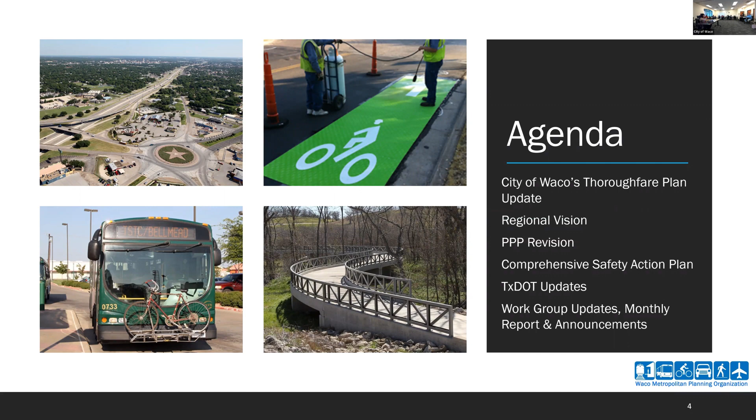The first item on the agenda is a presentation and discussion about Waco's 2023 thoroughfare plan update. We're in the middle of updating our thoroughfare plan. We're at the point where we'd like input from adjoining cities and like to share with you where we're at and what we're thinking. This is our draft of where we're at today, and I'm gonna let my friends from Kimley-Horn do the presentation so you can get some information about our thoroughfare plan.

Hey, how are y'all? Ryan Chamber, Kimley Horn, also with you, John Green. Got a little bit of a walkthrough on where we're at in the development of the draft plan.

Accomplished today, we'll talk a little bit about how we got there, but also some background on the history of the thoroughfare plan in the region. Introduce some of the cross sections that we introduced into the development of the plan. Also the process in which we've gone through to introduce some of the refinements in the thoroughfare plan, and then talk a little bit about what's next.

So first we want to discuss the evolution of the thoroughfare plan. Many of you know it, when the initial plan was developed back in 2000, really that looked at providing an adequate and efficient roadway network throughout the region. Providing connectivity between the jurisdictions was a critical component to that, but also making sure that from an emergency response standpoint, making sure for bus routes and connectivity through the schools, having a roadway system that really supports that.

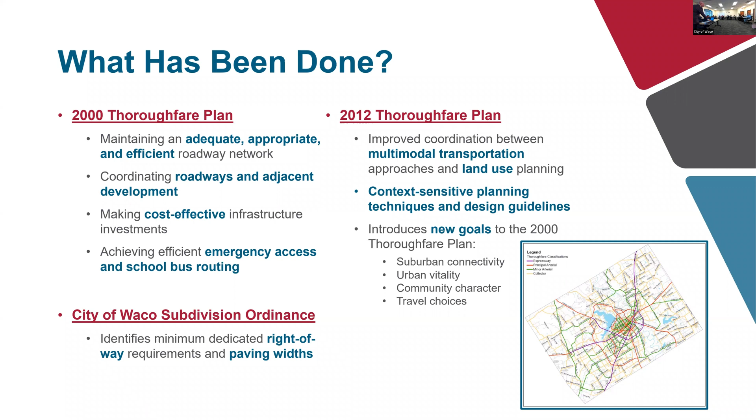So understanding that, where do we go from here? Even collectors are only shown under one class on the current thoroughfare plan. So let's talk about some of the cross sections.

We want to describe what currently exists in terms of the actual thoroughfare plan from 2012 versus the city's subdivision ordinance, because those two documents define the minimum right-of-way requirements for collectors and arterials, but they don't have any dimensions tied to cross section, nor do they include anything related to bike and pedestrian facilities. It's not really discussed, and you see that reflected in the different roadway sections.

So we organized the information for both the thoroughfare plan and the subdivision ordinance by street type, by right-of-way, and pavement width. You can see that while arterials and collectors are identified, there are differences in terms of right-of-way.

In the thoroughfare plan, there's a range of right-of-way from 100 to 120 feet, whereas per ordinance, for the principal arterials, it's 108 feet. That's historically what has been required, whether it's for development or roadways, at a specific pavement section.

Same thing, there are inconsistencies between the subdivision ordinance and the thoroughfare plan, even in the designation by name, whether it's major rural collectors versus commercial industrial. So there are opportunities here to eliminate some of these inconsistencies and clean this up.

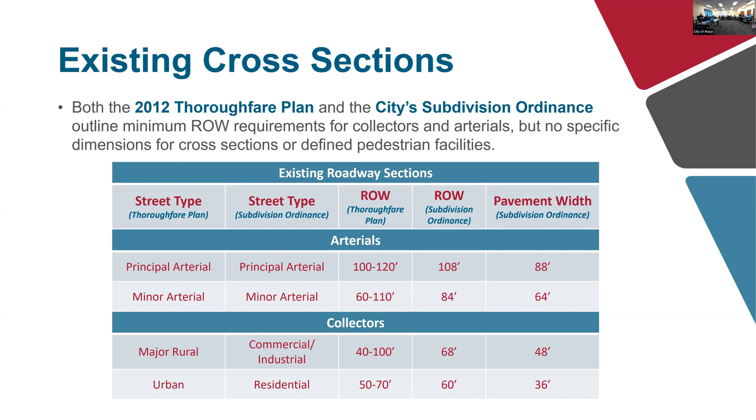So what we've done is look at identifying some proposed cross sections and what that would look like. Instead of just arterials, we're introducing going from principal arterials to minor arterials, with differences between the right-of-way, both preferred.

We understand that there are some locations or arterials throughout the region where we won't be able to get any additional right-of-way because it may currently be an existing 108 feet. That may be a constrained arterial section, and there probably always will be that. But for additional arterials, whether suburban or rural, we'd like to have 120 feet of right-of-way, though in some of your more minor arterials that might be down to 100 feet.

Pavement widths, again, now we're thinking about within that right-of-way, both the number of lanes, all 4-lane sections, but also introducing some of the parkway and both on-street and off-street pedestrian and bike facilities, and how that would impact both the arterials and the collectors.

So from a street context standpoint, we're looking at both suburban and rural. Then from the collectors, we would essentially have major collectors, those being suburban and rural, and then residential collectors. What we want to introduce today is also the actual cross sections.

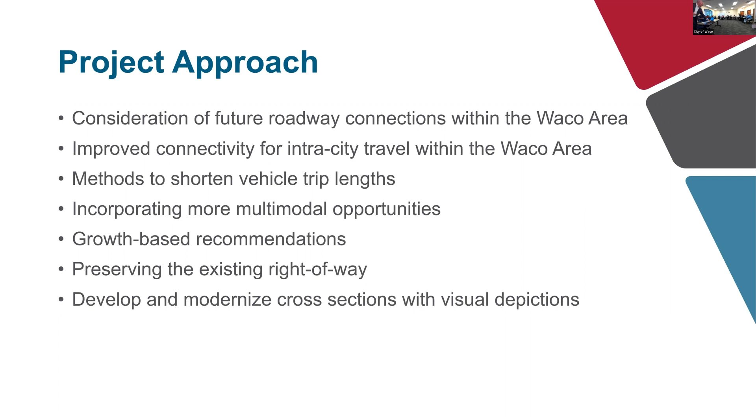So we started developing an overall inventory of the existing network.

Through use of existing aerials and imagery and actually driving the system, we understood what's currently out there as it relates to not only the existing thoroughfare plan, but also the national highway system. How does it relate to both of those documents? But also, does the road currently exist in its full configuration relative to the thoroughfare plan? Are there opportunities, are there needs for widening? So we looked at capacity, existing capacity. Is it rural? Is it urban? Is it curb and gutter? What facilities exist on those roadways? Are there existing sidewalks or needs for sidewalks or pedestrian facilities, or bike facilities on existing roadways? So we documented all of that.

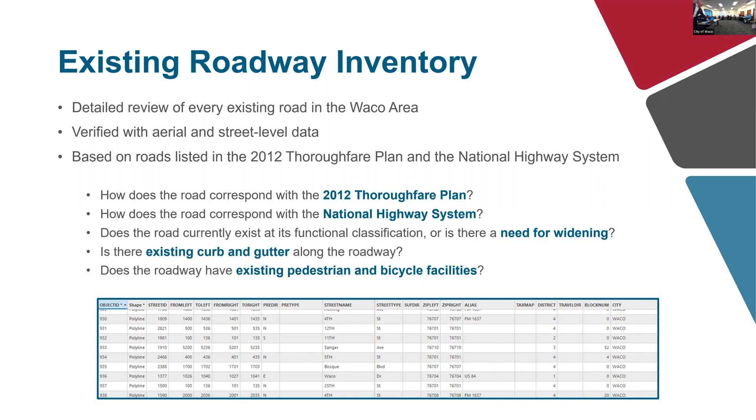All that's in our GIS environment. That's going to be provided, having both the existing conditions and the proposed thoroughfare plan. And then we looked at making sure that the existing thoroughfare plan is consistent and also understands and informs the national highway system, because that's been an issue that has been in place.

Understanding that these roadways are critical to mobility and to travel throughout the United States, it includes everything from the interstate system all the way to your collector roadways, and really serves as the backbone of the national system. It's maintained by TxDOT, and it's shown in a lot of the mapping that's provided, which TxDOT provides as kind of the base layer for a lot of the mapping.

From a functional classification standpoint, we classified roadways as either arterials or collectors based on existing traffic volumes that we obtained. Also, are there roadways that are either under or over capacity, or is there a need for upgrades? Again, understanding whether roadways are shown in consistency with the NHS, but also how it relates back to the existing thoroughfare plan. Is it currently at its existing designation, or does it need to be changed?

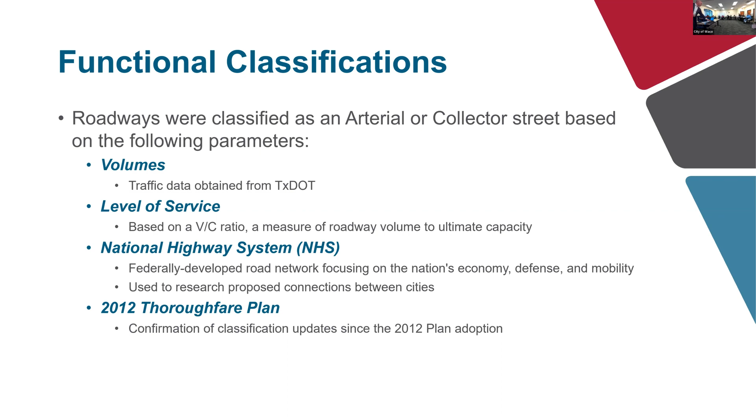From future alignments, we analyzed opportunities for new connections based on existing land uses and areas, focusing on arterials and collectors, where can we provide additional connectivity. Are there existing arterials where we need to have new arterials identified in other areas that are currently undeveloped?

You can see a lot of the areas shown here where we've got some of the changes, focusing even out throughout the ETJ. But also there's opportunities where existing thoroughfares may need to potentially change designation. When we looked at opportunities for connectivity, we understand there may be constraints, whether there's water features or areas where it would be challenging to provide new roadway. We took all that, within the existing parcels and land uses, into consideration to identify new roadways for future alignments.

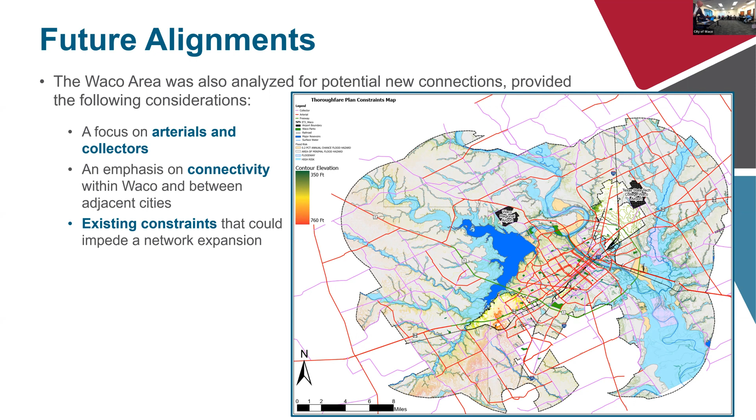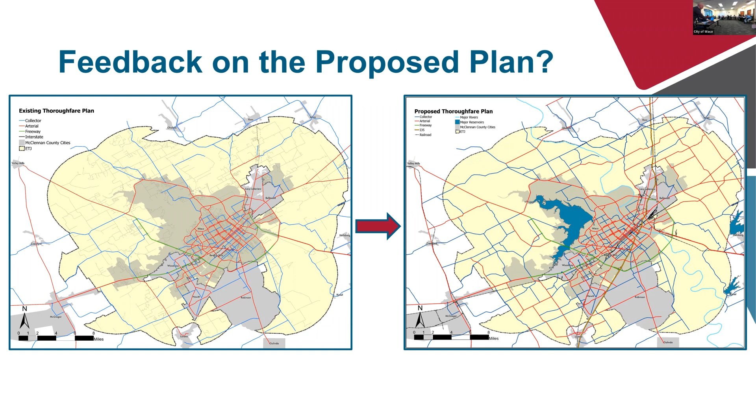So we're wanting to get feedback on some of these future alignments. Do these connections make sense? We've even shown some areas where this is the proposed thoroughfare plan. We've also shown both locations where we've upgraded existing facilities or they're new additions.

So anything shown that's red dash, those are actually new roadways. Anything in green is an upgraded facility, blue is a downgraded facility. So if it changed in functional classification up or down, we've shown that in blue or green, but then the dashed facilities are the proposed alignments.

We also, for your convenience, want to get feedback through an online mapping tool that will allow you to go and look in your areas of interest, whether within your city or area, at what's being proposed. It will allow you to provide feedback, provide comments, add points and say, hey, we think this alignment should be here. We can add actual alignments there, or provide comments on any areas that have changed. So there's a feedback form that we're now going to pass out.

That essentially talks about, it's kind of instructions for you. There's a QR code, got to have QR codes, so if you want, you can access it through your mobile phone, but there's also a link we're going to provide you that would send you to a website, and that would be one of the ways in which you can drop your comments onto the proposed thoroughfare plan.

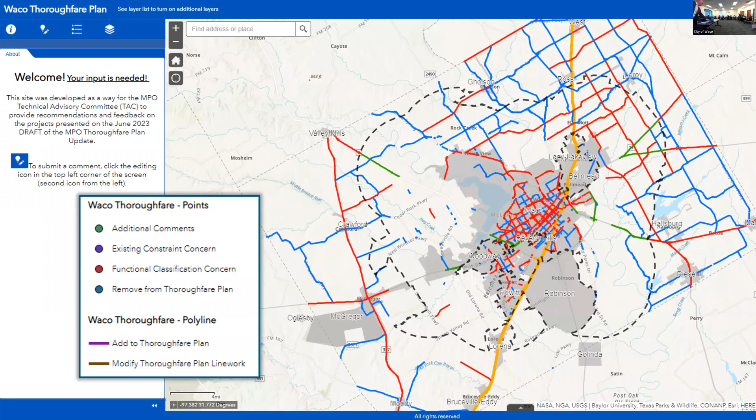This does show anything dashed in red is a new alignment, a new thoroughfare. If you need to see more, do we need to add something to this, maybe add another layer? Do we want to see parcel boundaries or anything else that maybe isn't shown? We can do that, and we can update it, refresh it, and provide it.

This gives you an idea—this is the actual map showing designation, both collector and arterials, and freeways. There are some areas now where roadways have been downgraded, shown in blue. Maybe they were freeway or principal arterial, and now they're more suburban arterial—that's a changing designation. They may still be an arterial, but we're reclassifying it.

Maybe because of right of way, or it may be an existing freeway that we think, in terms of designation, needs to be arterial. So you see there are some changes along 84, something like that. Some of these things may make complete sense, but we want to make sure you understand what changes occurred and where they occurred.

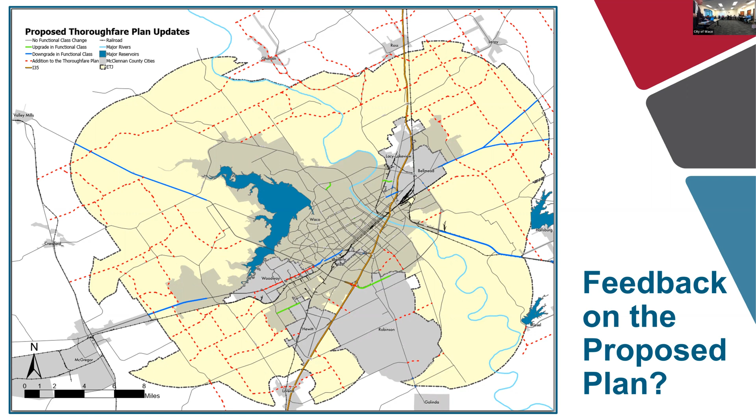I'd really encourage you to put some thought into it and provide us feedback, because this isn't the city of Waco saying this is what we want to do. This is the city of Waco saying we're working on this planning document, and it should help the local cities too, with a resource you maybe wouldn't have had otherwise. So you can give us feedback and we can incorporate that into the overall plan.

It would be fantastic if we could have feedback before Thanksgiving. Once we hit Thanksgiving, everybody gets incredibly busy and it'll probably get lost. November 14th—oh, earlier, that's right. November 14th, okay, so we did talk about that. I forgot about the date.

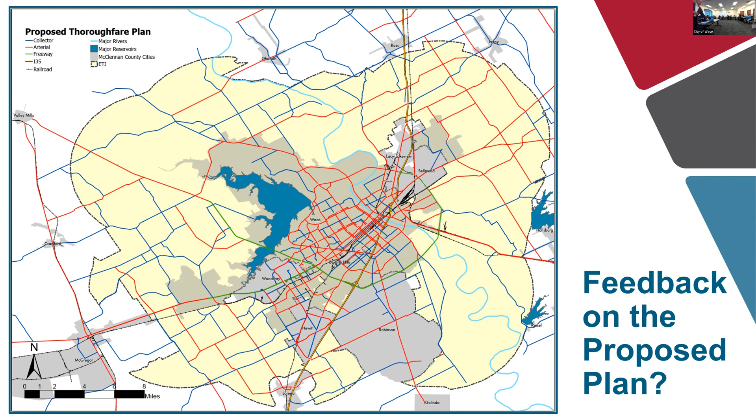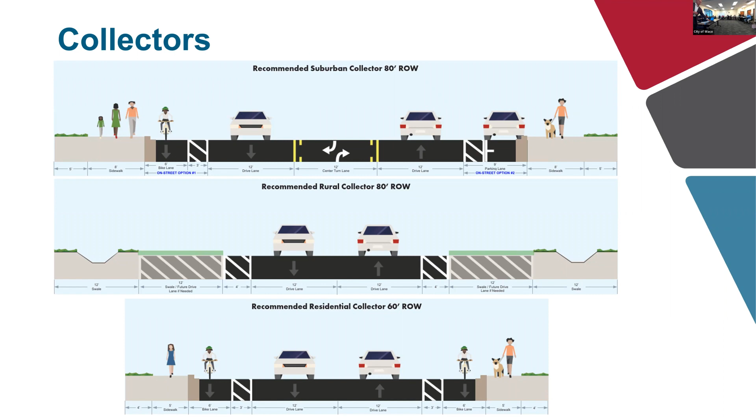One of the important items here is the relationship that the thoroughfare plan has with subdivision ordinance and regulations. We expect some areas around McLennan County are probably working on their subdivision regulations, so thinking about the thoroughfare plan in the context of new subdivisions becomes really important, not just where the main arterials and collectors are, but also how they relate to the subdivision ordinances that communities already have on their books.

The city is in the process of updating our design standards for street and stormwater, and also stripping those design criteria out of our ordinance and putting them in a separate design manual. So this is all part of this big process that we're in the midst of at this point.

Okay, so the next item is something else. Oh, everybody, I'm sorry, it's my first time, sorry. Okay, so we should have introduced everybody, so my apologies.

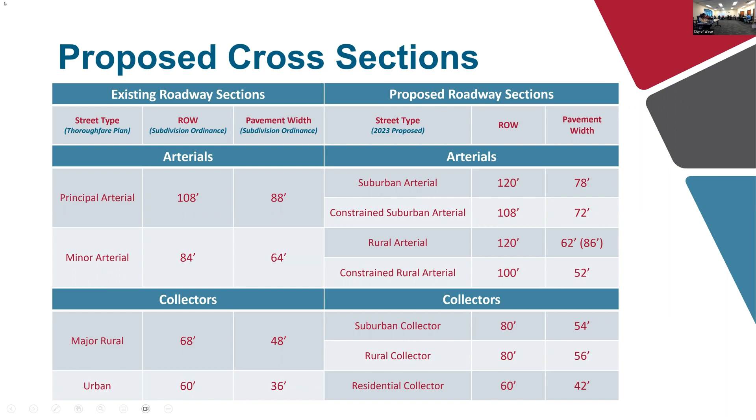You're supposed to have that up in the beginning. Okay, our next item of discussion is review and discussion regarding a vision statement developed during the regional vision workshop conducted last week, to guide our long range planning development for our 2045 metro transportation plan.

Several of you here were also part of the regional visioning workshop, and after about 3 hours of wonderful discussions, what we came up with is this statement. I'm going to read it verbatim, and what we'd really like is your feedback on whether it actually reflects the vision we discussed that day. Simultaneously, we also want to see if we can clean it up a little bit, because I must admit, I've seen several vision statements, and this is one of the lengthier ones we've come up with - I've seen them very short and sweet. But the most important part is making sure the entire region is reflected accurately in this vision statement. So I'm going to go ahead and read this.